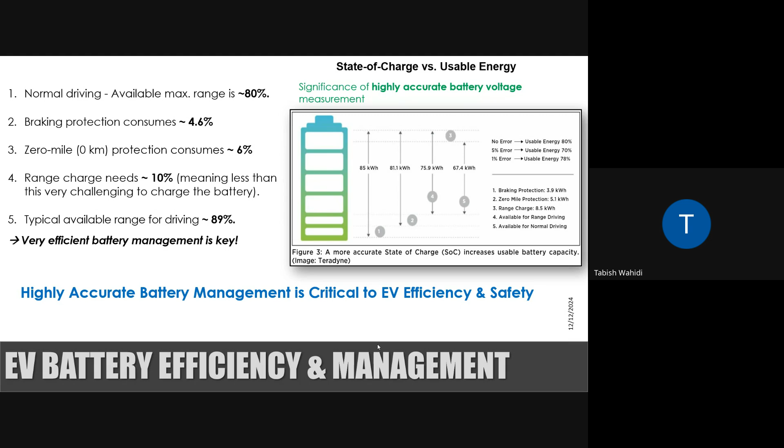So to tackle all these things, your battery management has to be considered very effectively and accurately. And all this comes with your battery efficiency as well as your safety. The safety perspective I'm talking about is the thermal management case. I'm not talking about the drop test or edge test or hardness test of the battery. I'm only concentrating on the battery thermal safety conditions.

Now, if you talk about EV applications in various sectors, it's not only one thing you need to consider, like optimizing the battery behavior so the temperature is not very high. We always have to consider how the effect of the battery comes into the complete vehicle. Sometimes your thermal runaway problem may go such that the temperature is very high and it will burn out. Suppose you are sitting in a car and your feet start feeling high heat. There is a rule called the 5-minute safety rule: if a battery starts burning, it should not burn within 5 minutes. So that needs to be considered.

Your floor temperature should not be very high. If you have an electronic system connected around this battery, your electronic system should not start burning. Because of electric heating, there will be a case of Joule heating, where you may find continuous heating because of the transfer of current. So it may come into the picture. Even suppose you are driving your car in an area where fog is very high and you need to defrost, because of that your energy consumption starts increasing.

Again, in some cases, suppose you are using your battery for cabin comfort, like using your battery power to switch on your AC. So again, your battery life, your range, everything comes into consideration. So it is like a combination. It's not only one thing linked here, that if you only optimize the battery, everything will work fine.

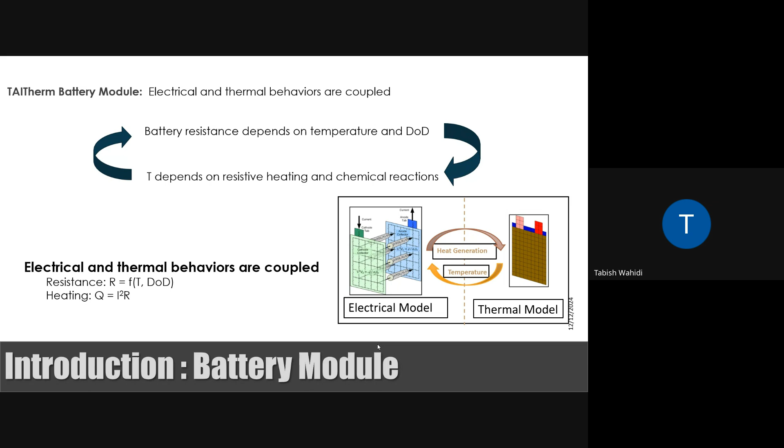All these, am I audible to everyone? Hello? Yes, sir. Okay. Just a little switch on, noise, confusion. Okay. Fine for everyone? Hope I am visible to all you guys so that we can interact with each other.

Okay, so your battery behavior depends on so many things. One very interesting thing is your battery depth of discharge. Your resistance is a function of your temperature as well as depth of discharge, and heating depends on how much current is passing through and what the resistance is. So you need to balance these two to understand your thermal management in these cases.

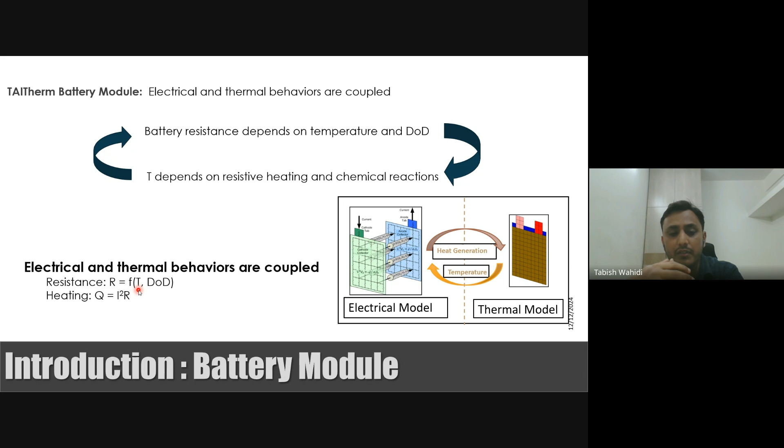Now, a few things need to be considered when you have a battery around. One very important thing is what type of battery packaging you're using. Are you using a pouch cell, a prismatic cell, or a cylindrical cell? All these batteries have different applications. Suppose Tesla is using a cylindrical cell, Tata is using a prismatic cell, and another is using pouch cells.

It depends on how much space they have, what efficiency they are offering you, how much range they are offering you. This depends on so many things, not just one thing I'm talking about. So when you have a battery, thermal modeling comes into the picture. Everything needs to be considered based on the type of battery cells.

If you have a hybrid vehicle, suppose you are trying to integrate your battery with IC engines, the modeling will be completely different, because when the exhaust gas is coming out from your exhaust system, the temperature nearby will be very high, and you already have a battery pack inside there. So how are you going to tackle these two things so that your battery has maximum efficiency and you don't have to worry about high temperature conditions while the exhaust and IC engine are running?

Now we'll come to a few things like cooling optimization techniques, what type of cooling you can do, how you want to balance your load. Suppose two or five people are sitting inside, so mass balancing also comes into the picture. And there's the case of fast charging. Suppose you have to go somewhere urgently and don't have time, so you go for fast charging. Because of fast charging, the temperature goes very high. So you need to balance all these things.

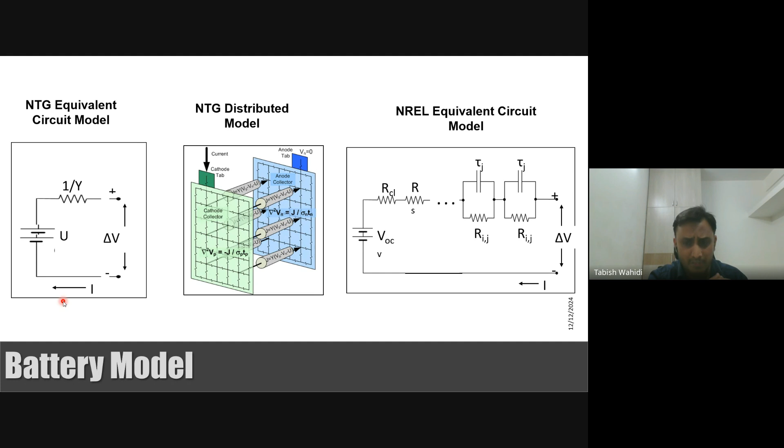So we have three types of models when we do the battery modeling. One is called the equivalent circuit model. One is your distributed model, and one is a very commonly used and well-known model, NREL. All these models are quite common when you're trying to model the battery. Each has its own advantages and limitations. Each has its own disadvantages too. So let us discuss this.

Suppose you talk about the distributed model and compare it with the equivalent model. Generally, in a distributed model, we need to give a lot of inputs when you start the simulation. So it will demand a lot. Every input needs to be given. What is the flow rate? What is the current distribution? How is it running? How is the temperature distributed? How is the voltage distributed? Everything will come into the picture. Because of the high detail, obviously your simulation will be a little bit slow.

But it's very good when you do a cell model. Very good. It will give you complete information: where the hot spots are coming, how your temperature is getting distributed. So for cell level analysis, it's very good. But if you talk about pack level analysis, it's difficult for a distributed model to analyze it. So people started trusting the equivalent circuit model. It requires very low detail, so the simulation becomes very fast, and it is well known for the pack model.

And along with that, suppose you have a drive cycle analysis, you keep on driving different routes, you have uphill or downhill, highway driving, or city driving. So with all the rash or smooth driving conditions, your driving cycle comes into the picture, and then people start trusting the equivalent circuit model. So each has its own limitations and its own advantages.

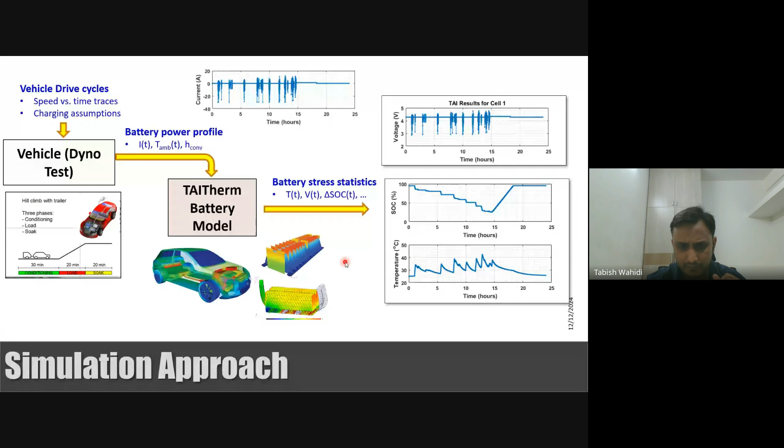So coming down to a few case studies that I'll discuss from when we had interactions with different OEMs, and we published some papers along with them. Okay. So one of the very interesting cases is what is called thermal runaway. People generally find thermal runaway conditions very interesting. You may find videos on social media where a battery starts burning very high. All of a sudden the temperature starts increasing a lot, and it is burning like anything. Smoke will come out.

So when people came out with the idea of EV batteries, they didn't know about this thermal runaway condition. After vehicles came on the road and a few things happened, people came to know about thermal runaway conditions, and they're trying to find what exactly it is. Okay, so people define thermal runaway as happening when you have an unwanted chemical reaction inside your battery. It may happen because of a short circuit, or internal discharge, or overcharging conditions, or when your ambient condition is very bad and you have very high temperature. So understanding this is very important. If your batteries start burning very fast, your complete pack will start burning.

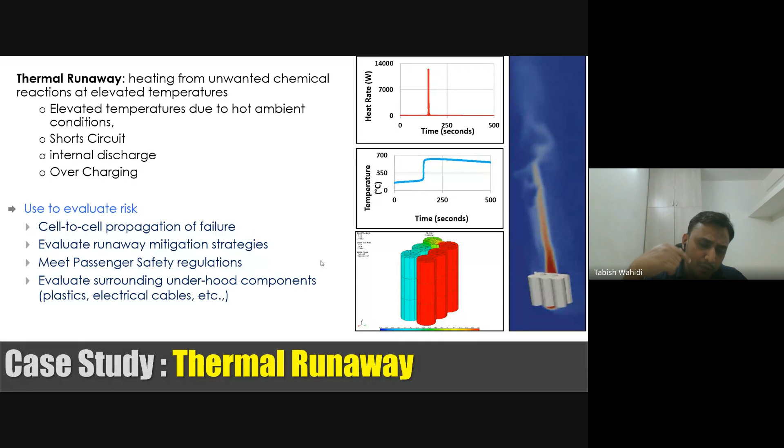If one cell goes into runaway, it will start propagating heat to the nearby cell, and because of that, the complete pack will start burning. It's very important to understand how heat is propagated from one cell to another, and how much time it takes for one cell to burn another. We need to understand this flow and come up with mitigation techniques or strategies to mitigate this thermal runaway.

So for this type of thing, I'll give you brief information. This will be common for every interaction, whether you're trying to understand it or not.

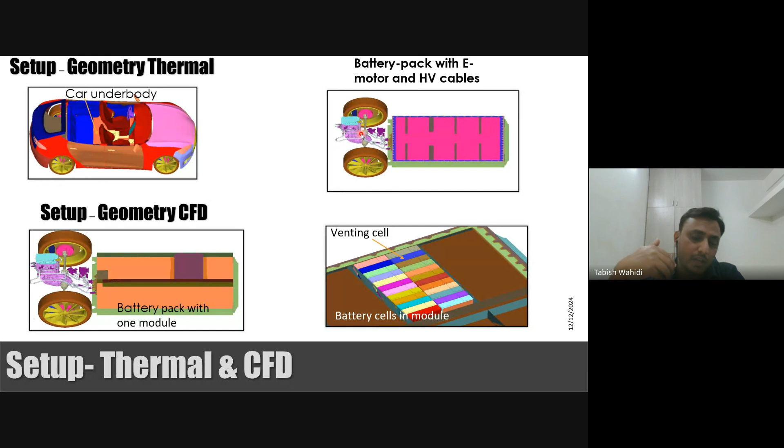We need to understand your battery model, what type it actually is: a cylindrical cell, prismatic cell, or pouch type cell. Every battery has its own nature of burning, depending on how much power the battery has, whether you're using 48-volt battery packs or whatever type it is. The number of batteries matters, and the sequence of batteries also matters, how you arrange all this, and what cooling strategies you've used earlier when trying to predict the thermal runaway condition. These are just conditions.

Sometimes to tackle this, generally what we do in the simulation is consider that your battery temperature has to be very high to understand this thermal runaway condition. You keep your gas velocity, when after burning the gas comes out, this needs to be considered very high. Generally I keep it at 100 meters, and the gas temperature will be very high, around 1000, because thermal runaway may happen after 400 or 500 degrees Celsius.

Then you have to define what material it is, and why I kept the simulation time at 5 minutes. This is interesting because NCAP maintains a standard that your battery should not burn before 5 minutes. This is a standard criteria. If your battery is burning before 5 minutes, then your battery is ruled out, you can't use it for EV vehicles. This is called the 5-minute safety rule.

Sometimes what we have to do is interact, coupling your thermal behavior with CFD. So what we do is start doing some pre-processing, which I call a CFD analysis. After doing some CFD analysis, I try to find out how much gas temperature is coming out, what is the flow pattern of the gas, and what is the flow pattern of the fluid. So I come out with a heat transfer coefficient value, I try to find the temperature of T fluid, then try to couple it with the thermal solver.

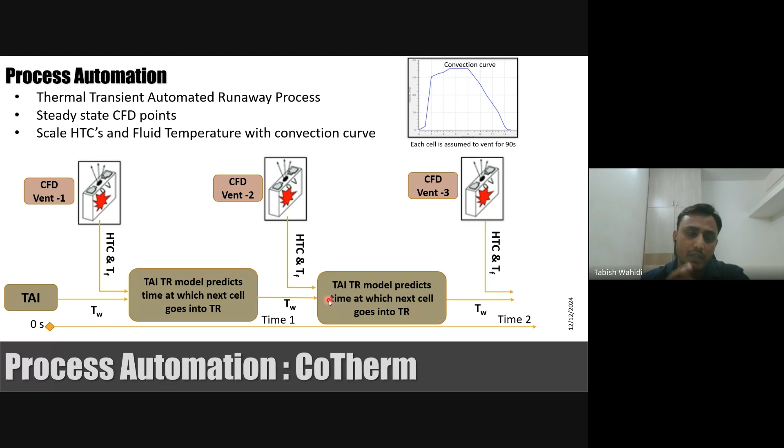So I'm going to deal with one case where we have a battery pack of 24 prismatic cells, and we need to configure it as per the information given by the OEM, what sort of electric current is flowing, how the distribution is happening, and what type of model they are using, this NREL model or distributed model, that we need to configure.

Then you do the geometry or meshing for this simulation, and we try to mitigate it. There are so many strategies to mitigate: you can provide a passive cooling system, you can go for an active cooling system, or people come up with a phase change material cooling system also. So you may come up with a solution that change of material will be the solution, or you can increase the thickness between the cells, so that if your thickness is very high, the time of propagation of heat will be more.

In this case, what I'm going to discuss is the change of insulation. We'll try to understand how temperature propagates from one cell to another cell, and what is the time of thermal runaway. After how many minutes will the complete cell start burning, the complete pack start burning. We'll try to understand which thickness will be optimum so that the battery won't go into runaway. This is the case scenario.

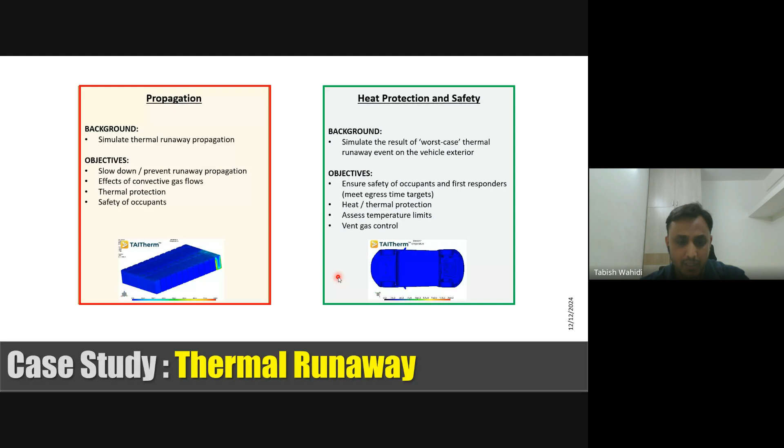Along with this propagation of heat transfer from one cell to another, I'm also trying to understand this aspect: suppose your battery gets very high temperature, because of that your floor temperature becomes very high, your motor wires or motor will start getting very high temperature. Because of that your motor may get burned, your wire connections may get burned, or your electronic system may get burned. We'll try to understand this scenario too, along with the runaway condition - how the battery is running away, how much time it takes, and how the inside temperature, floor temperature, motor temperature, and cable connections are absorbing the heat. So this is the connection.

First, what we will do is trigger one cell. We trigger one cell with very high temperature, suppose 1000 degrees Celsius, so the cell goes into runaway. Then we'll try to find how much time it takes for the other cells to go into runaway. There is a sequence going on - the second cell goes into runaway after 1.5 or 1.9 minutes, another goes at 2.5 minutes. So from one cell to the other, the complete battery runs away within 5 minutes. All things are running away within 5 minutes.

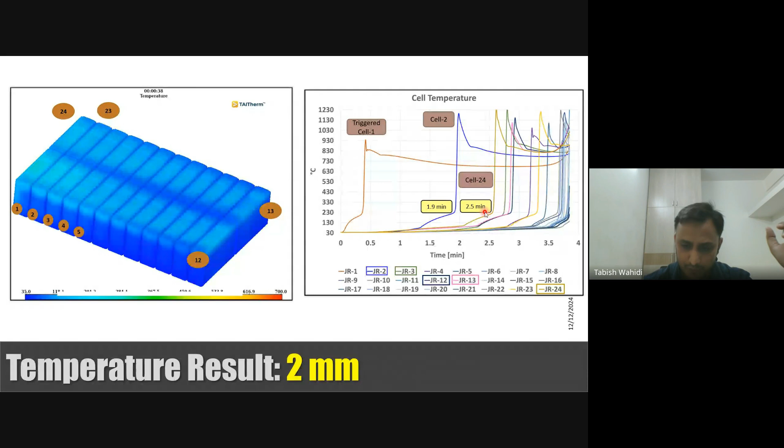Now we'll start doing the calculation by increasing the thickness between the cells. We'll increase the thickness, and also calculate the temperature of the surface - how much the surface temperature is going up. If you try to find it out, the temperature goes more than 500 degrees Celsius. From that initial calculation, we found that if you don't have any insulation between these, your steel layer and carpet, the temperature will be around 500 degrees Celsius.

If you put any insulating material like polyethylene foam between your carpet and steel, the temperature may go up to around 80 degrees Celsius. That is also a way to insulate your floor. Still, your temperature is very high, around 80 or 70 degrees Celsius - not easy for a human sitting on this to feel comfortable. It's not possible. But although from 500 down to 70, we can achieve this by putting polyethylene foam insulation in between. So just giving you information that because of runaway, your floor temperature is also increasing.

Now we'll try increasing the cell spacing to 4mm, and also try 8mm, and then compare how it will be. Now if you have a 4mm cell spacing, we'll try to understand how this propagation is happening. If you look into this, the propagation is quite different.

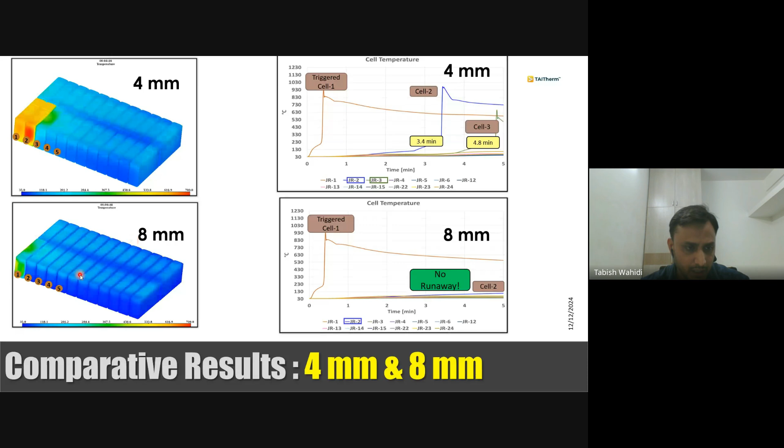So as a sequence, I started increasing thickness from 4 mm to 8 mm. Now from 8 mm, you can feel the difference in heat propagation. From one cell to another cell, it's taking more than 5 minutes to burn out, so your second cell is not burning within 5 minutes. With this, we find that if you keep your thickness around 8 mm, you can avoid thermal runaway conditions. So just by changing cell thickness is one way to counter thermal runaway.

So my question is, do we have only one method to do all this? Can we go for a combination of methods instead? Suppose by increasing to 8 mm, your battery mass comes into picture, so we need to optimize this. How can we do that? Again, we need to come up with new strategies.

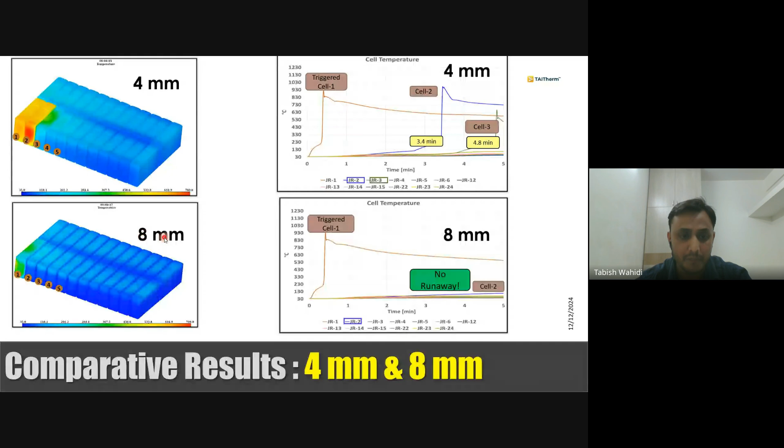Although 8 mm is sufficient to tackle the thermal condition, your cell thickness increasing means your complete battery pack weight is increasing. Now we need to go for another method, and we'll try to find it out.

If you have a 2 mm cell versus an 8 mm cell, there will be a difference in surface temperature also. The surface temperature comes down much less this time, and also you can protect your engine, your motors, and nearby electronics condition. So these are methods we can use to tackle this.

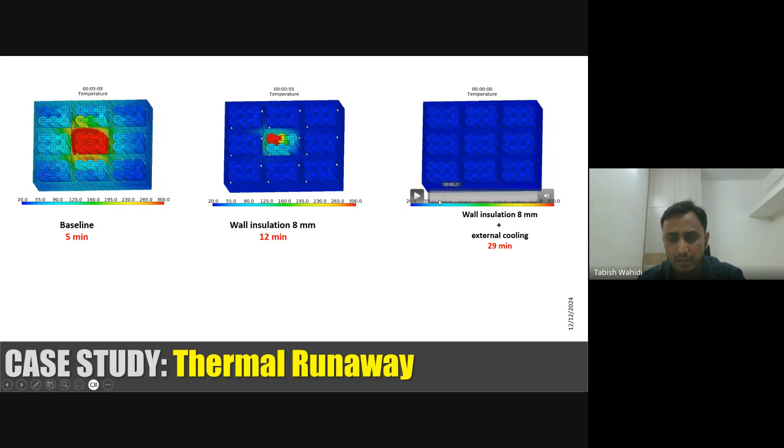Suppose you have a condition like 8 mm, then 5 mm safety insulation, then you try to insulate it with... okay, I need to change this, actually it is 5 mm only.

So with 5 mm and an external cooling system, you can increase it to 30 minutes also. We can optimize by balancing things - your mass balancing as well as your electronic cooling system balancing. That is very important. When you have to balance your mass, you need to come up with a new plan.

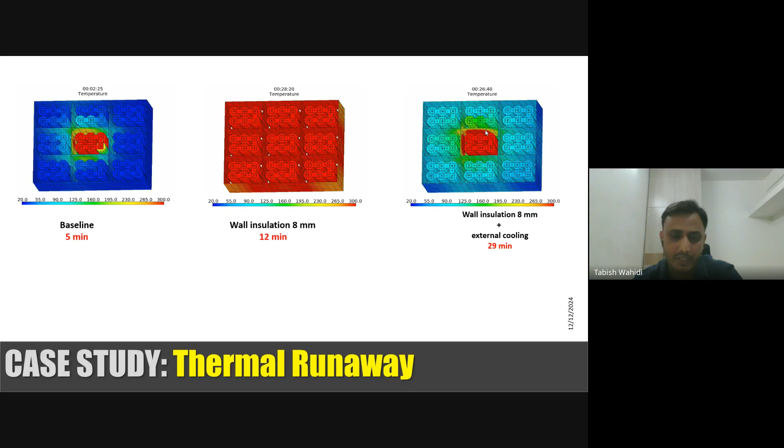So this is the strategy we finalized: wall insulation of 5 mm plus an external liquid cooling system. This will help increase your burn time condition, and you can go up to 30 minutes. That is the final study we found.

Now I'll discuss one very interesting scenario, called fast charging cases. Suppose your battery is very small - you are using a small battery, say a cell of 25 ampere hours. Because of your fast charging condition, your battery temperature will go very high.

Take a condition where you have 1 hour of city driving, then you have to go for 15 minutes of fast charging, and you do it 4 times. This is one case scenario, and you compare this with 1 hour of city driving plus 2 hours of normal charging, also done 4 times. These are just for comparison between us.

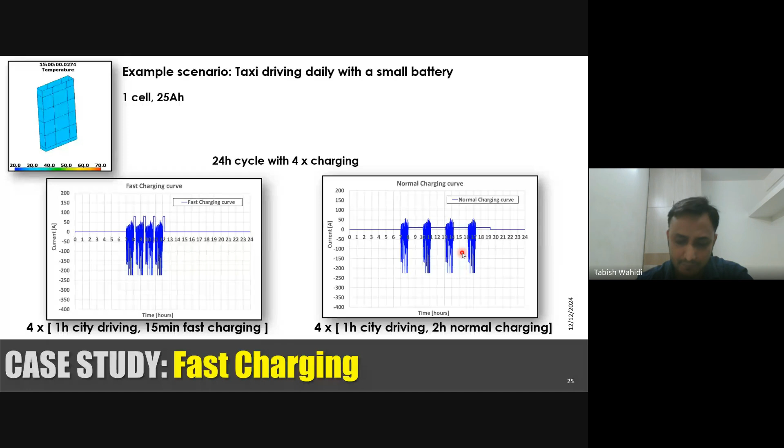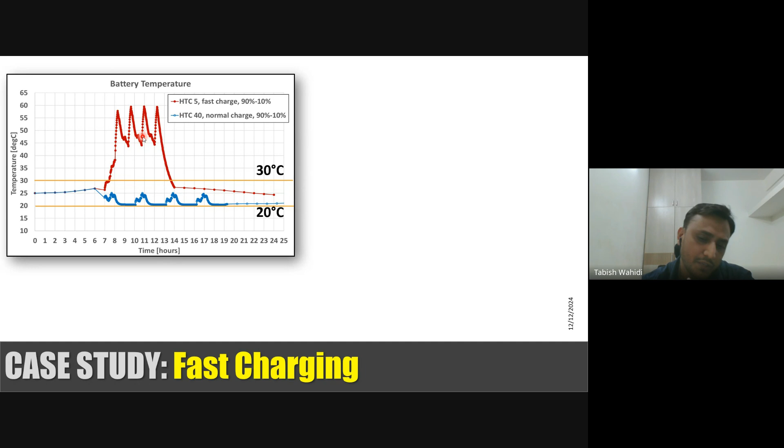Okay, so if you have a battery and you try to do it in a fast charging condition, generally the ideal operating range we used to keep your battery in will be between 30 to 20. But because of the fast charging condition, your battery temperatures are going very high, touching up to 60 degrees Celsius. Because of this, if you keep on doing all these things continuously, there is a chance that your battery life will come down.

So if your normal battery condition is suppose this much, you may lose up to 2 years or 1.8 years of this because of the fast charging condition. Your battery life may decrease very highly. Okay, so with this we can say that battery charging causes very high temperature, that is for sure, and it also impacts the lifetime of the battery.

Okay, now what we can do, that is very important. What sort of cooling strategies? It is sure that we have to come up with cooling strategies when you have a case like fast charging every day, and you can't avoid fast charging because you need to run a taxi every time, and after a lot of city driving you have to keep on charging, because you can't increase the size of the battery. So we need to keep on fast charging, we need to earn more. Suppose an auto wala is doing such a thing. So what sort of plan do we need to come up with?

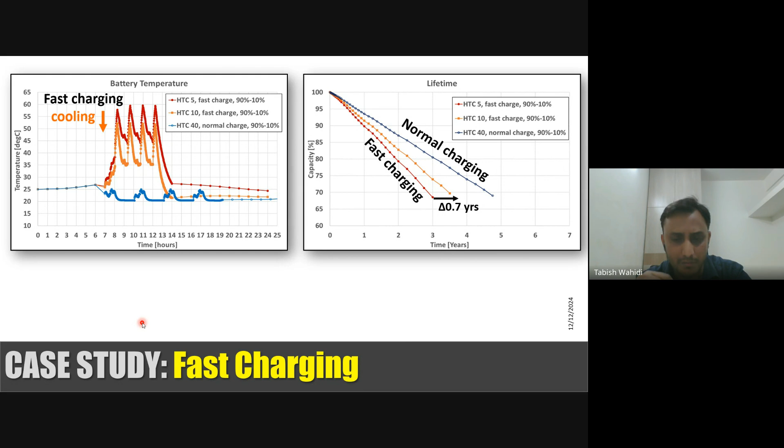Now, one is fast charging along with a cooling system. Suppose you provided a cooling system with a heat transfer coefficient of 10, keeping your fast charging condition as it is, and you compare with normal cooling conditions, to find how much we can improve the life, because before it was a loss of 1.8 years, almost 2 years of battery life lost. So with this HTC value of 10 and a proper cooling system, we can increase the battery life by up to 0.7 years more.

Okay, do we have any other method to increase it? We'll check it out. Suppose you increase your HTC value from 10 to 20, still we can increase the life of the battery, up to 1 year. Let us change one more value. Suppose you go with an HTC value of 40, your battery life may increase by 1.4 years. Before that, it was a 1.8 year loss. Now you have only a loss of 0.4 years if you keep on charging your battery in a fast charging condition.

So cooling improves the lifetime of the battery, and it also depends on what type of cooling strategy you are using. Are you using a passive cooling system, a water cooling system, or an air cooling system? What is your cooling pad design, how you model it, what is the optimum design? Everything will come into picture when you do all these types of analysis. We may come up with a better design with design optimization, for example a topology optimization of a battery cooling pad, to increase the battery life. That is just this example of the fast charging condition.

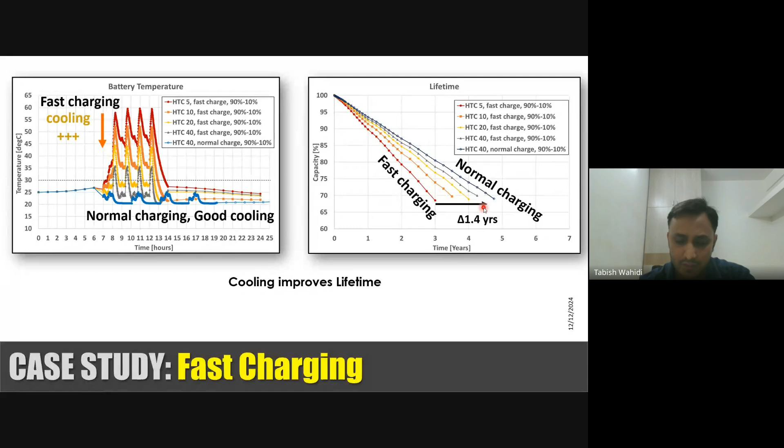Now I'll discuss a very interesting case called plug-in hybrid. In plug-in hybrid cases, you have an exhaust system, and you mount the battery over this exhaust system, your battery is located here. When your exhaust system is running, your battery will start absorbing heat. Because of continuously absorbing heat, your battery life may get impacted. We need to think what sort of strategies we have to use, because of high temperature there may be a chance that your battery cells go into thermal runaway.

So deciding where I should keep my battery is also a better way of thinking. All this is very important. Where should I keep my battery? Whether it will be near the exhaust system or away from it, and do we have proper space to put it so that your battery does not get damaged because of any condition happening.

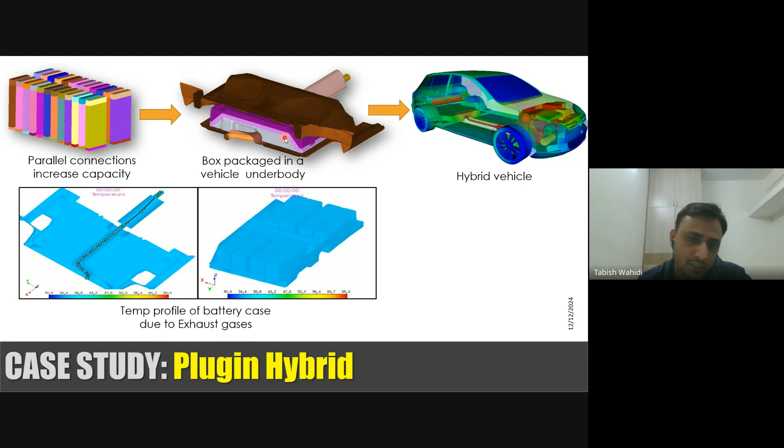So all these you need to consider when you have plug-in cases. Now, as we try to understand why we do all these plug-in hybrid cases, just a few things. First, suppose you have mounted your battery, and you don't have space to mount it somewhere else. You mounted your battery just above your exhaust system. It will look something like this. Your battery pack is up there and all these exhausts are working.

Then we try to find out how much temperature is coming. You create a fluid domain around your exhaust system and try to calculate how much temperature is coming because of the exhaust burning. We'll try to find out this temperature, and because of this temperature, how much heat your battery is absorbing, because of the high temperature across your exhaust system.

Then we'll try to come up with a solution. How can we do it? Do we need to provide a proper cooling system around this, or is one single insulation sufficient to protect your battery? In this case, we provided an insulation around the battery that was sufficient to protect our battery. With this, we found that the gas coming out from your exhaust system is also not hampering your battery. Your battery cells are not going into runaway. Your battery life is not even getting hampered.

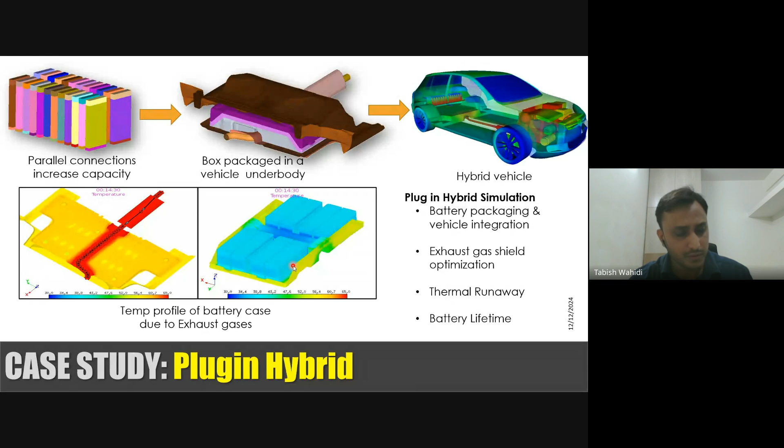So when you have plug-in hybrid cases, many things become very complicated compared to others. Now I'll give you one very interesting case, called HVAC optimization with humans sitting inside. Take the electric bus scenario: nowadays around Bangalore and other cities, electric buses are running throughout the city. With electric buses we face multiple problems. Suppose you switch on your AC. Because we don't have an exhaust system, the HVAC will use your battery power, and generally we found around 40% will be taken by the HVAC system to maintain the inside temperature.

And the problem won't stop here, because your HVAC is already consuming your battery. Apart from that, you don't know when your bus will stop, when your door will open, when your door will close. It's not like a car where you're driving your own vehicle and you know where to stop and when to get down. In a bus, you have multiple stoppages. After every kilometer you need to stop, open the door, close the door. Because of that, your HVAC optimization will be greatly adversely affected. And for the people coming inside, you don't know how many occupants will sit inside, what body size and mass they have; that also comes into the picture.

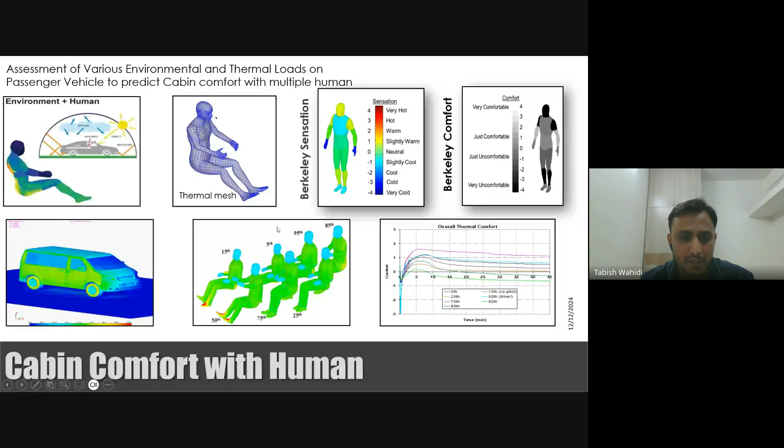So this case was very interesting. We need to understand a few things. Just an example: suppose humans of multiple different body sizes are sitting inside at different locations. Someone is tall, someone is fat, someone is average size. Everyone has a different physiology and different body mass index. And based on that, which one is sitting near the HVAC system and which is sitting away from the HVAC system. This is also very interesting for you.

And then apart from all these things, we need to understand, if say AC is switched on, what the human comfort level is, what his sensation level is, whether he's feeling comfortable or not, whether he's sweating or shivering. Those we need to consider.

So to tackle these things, to understand human behavior from the perspective of comfort and sensation, Berkeley, you might have heard of the University of Berkeley, developed a model called the Berkeley model that is widely used all around the world by the automobile sector to understand human comfort and sensation. Both are different. Don't think both are the same. Sensation and comfort are different.

I'll give you an example. Suppose on a summer day you are outside. Suddenly you enter your home, and your AC is around 16. All of a sudden, when you enter your home and your AC is at 16, you will start feeling comfortable, very comfortable. Although your AC is at a very low temperature, you start feeling comfortable.

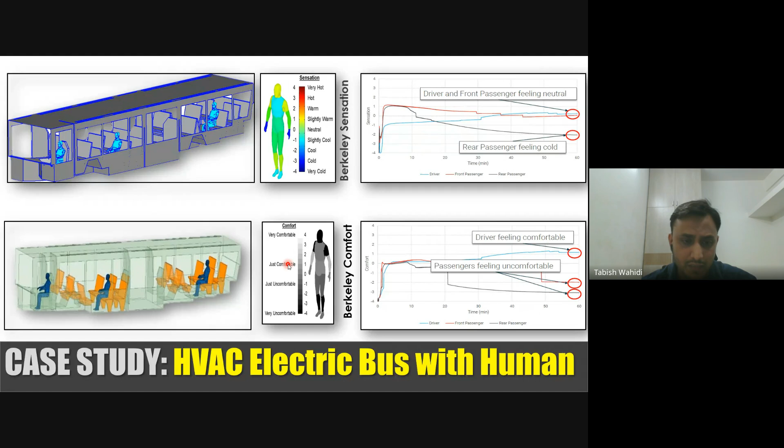Suppose your AC is just in front of the driver, the air blown from it may disturb your driver while driving, or the air coming out may be so cold that the driver starts feeling chill. If the driver gets disturbed, the whole thing gets disturbed. So that we need to understand. Based on that, we can suggest the in-cabin condition if your bus's battery is being used by the HVAC system. All this is a very complicated case that we did for one OEM.

Now I'll discuss one scenario called the drive cycle scenario, and this is very interesting. Generally on the road, we count the mileage of your vehicle. It depends on how you drive your vehicle. If you have rash driving, your mileage is less. If you have smooth driving around 40, 50, your mileage will be very good. The battery also behaves in the same way.

So suppose your driving pattern, your speed, is continuously changing. You are driving in the city or on a highway. What are your battery parameters, what is your driving pattern, and what is the weather condition there, whether it is a hot day or a cold day.

Okay, and what are the EV parameters you have, what is the size of the battery, how much power the battery has, what type of battery it is, whether cylindrical, pouch or whatever battery it is. So everything you need to consider, and then based on your driving pattern and driving style, we can finalize whether this is sufficient for you or not.

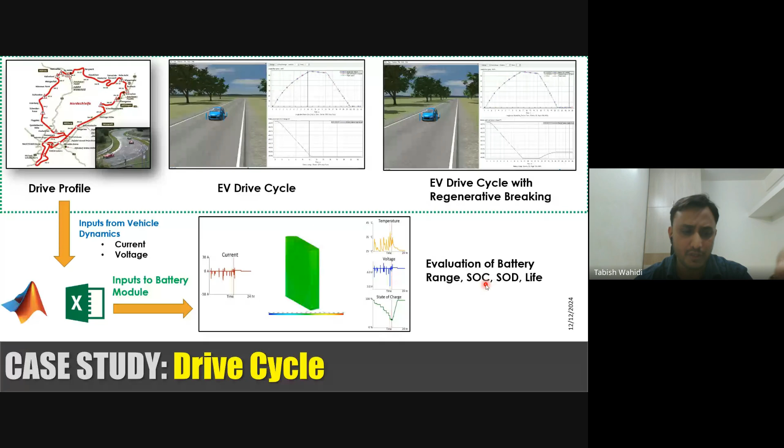You may require a MATLAB tool or some other tool to understand this one. Then you try to fit the data to your battery system. You try to calculate how the current is flowing, what the temperature is coming out, after how much time your battery gets discharged. All these will help you understand what will be the range of the battery, the health of your battery, the life of the battery, and the nature of the state of discharge or state of charge. All of this is very important. We have a drive cycle condition.

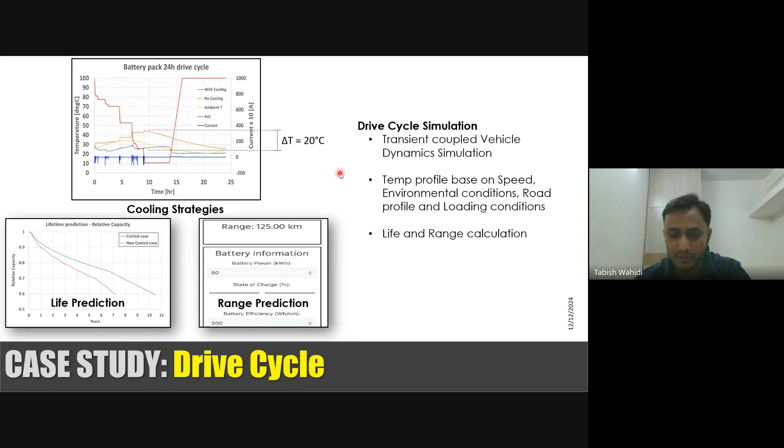This is just a flow pattern, a drive process automation chart that I'm showing to you. Based on that, you can predict the in-cell temperature with or without a cooling system, if your ambient temperature is varying, what the life and range of your battery will be. If you are driving in a very cold condition and going uphill, the battery life will be different. If you run the same battery in a desert, your battery life may be affected differently. So all these weather conditions, your geographical conditions, your road pattern, your drive cycle will help us understand the life, range, and temperature of the battery.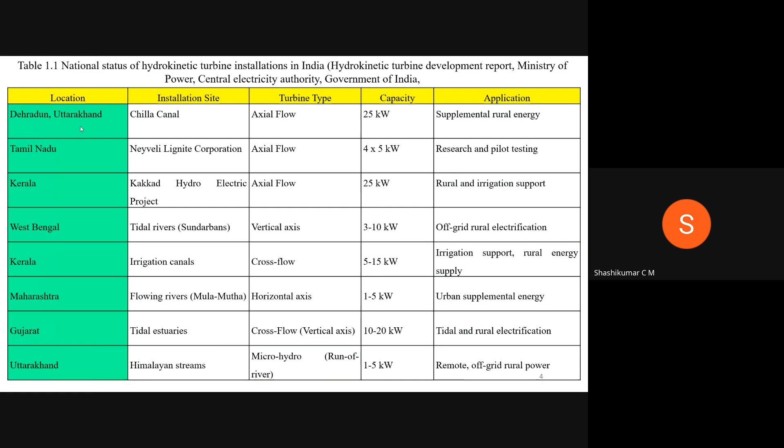Solid mooring turbines, buoyant mooring turbines. Coming to the cross flow type of turbine, the cross flow type of turbine has more advantages.

The cross flow type of turbines is mainly classified into two types: vertical axis and in-plane axis. The vertical axis turbine is classified into various types, including the Darrieus turbine, which is a lift type and also a helical type of turbine, as well as the Savonius turbine.

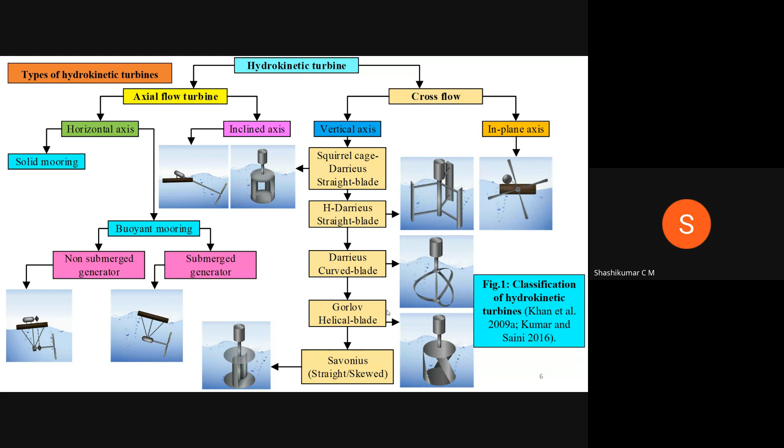The water turbine can be installed in rivers as well as irrigation channels. It has more advantages in irrigation channels, because the movement of flow is in only one particular direction, and there are no disturbances compared to a river. So we get a good amount of velocity in irrigation channels, up to 2 meters per second, so that we can extract a good amount of electricity.

To improve the performance of these kinds of turbines, various design modifications are required. These design parameters of the Savonius turbine include aspect ratio, overlap ratio, separation gap, and the use of end plates. By using multi-staging instead of single stage, we can increase the number of blade profiles. Another important parameter is the use of augmentation techniques, and also modifying the blade profiles.

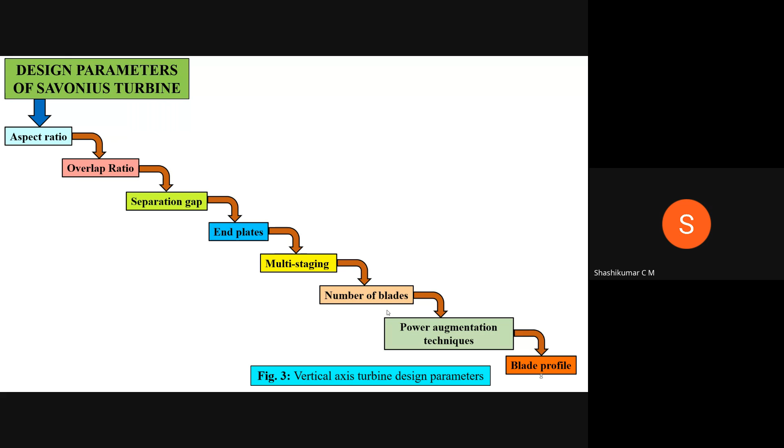The first important aspect for increasing the performance of the Savonius turbine is the aspect ratio, which is the ratio of the height of the turbine to the diameter of the turbine. As the aspect ratio increases, suppose if we install these turbines in irrigation channels, which have a very good depth of water, if you increase the aspect ratio more than 1.8, we can extract more kinetic energy into electricity, so a higher aspect ratio is recommended.

This applies if you are using these turbines in irrigation channels. H is the height of the turbine and D is the diameter of the turbine. The aspect ratio is a dimensionless parameter. These turbines have various aspect ratios ranging from 0.5 to 2.

Another advantage is using a lower aspect ratio. Suppose you use a lower aspect ratio, the torque generated by the turbine is higher. If you use a higher aspect ratio, the turbine will rotate at higher RPM. If you use a lower aspect ratio, we get more torque. Based on the application, we can use different types of aspect ratio.

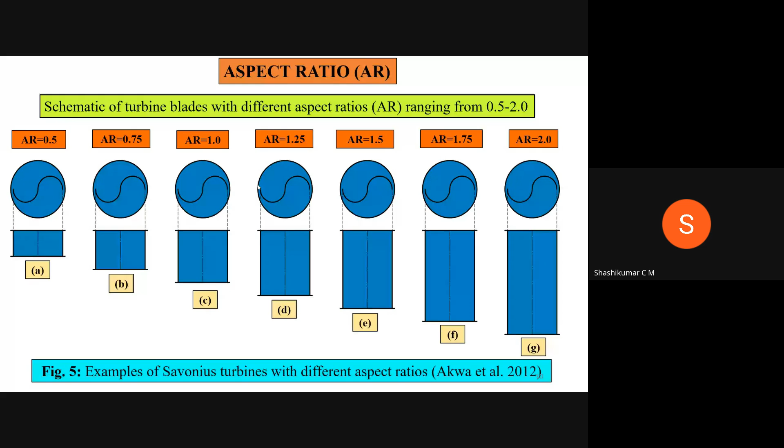Another important parameter to increase the performance of the Savonius turbine is the overlap ratio. In the previous case, the turbine did not have any overlap ratio. The overlap ratio means there is a small gap between the advancing blade and the returning blade, so that whatever fluid—either air or water—enters the advancing blade, some part of it will impinge on the returning blade profile, increasing the overall efficiency of the turbine.

An optimum value of overlap ratio is required. This is the schematic diagram for the turbine having zero overlap ratio, as well as the turbine with overlap ratio.

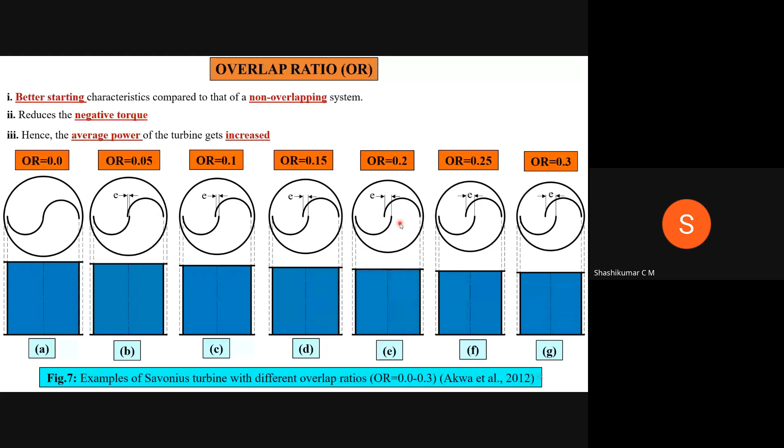If you increase the overlap ratio by giving a gap between the advancing and returning blade profile, the fluid entering will not hit the advancing blade but will directly hit the returning blade profile, reducing turbine performance. So the optimum value of the overlap ratio is 0.15, which gives the best performance.

The next design parameter is the separation gap, which is a gap provided between the advancing and returning blade profiles. If you provide this gap, the fluid entering will easily pass through it instead of impinging on the returning blade profile, so the turbine will not get good performance. It is not recommended to give the separation gap between the advancing and returning blade profiles. A turbine without separation gap gives better performance compared to one with a separation gap.

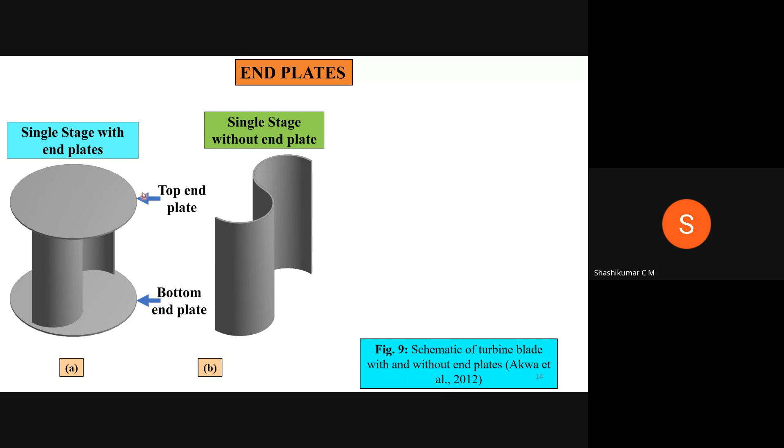Next is design with end plates versus without end plates. Using end plates causes the fluid to be protected within the turbine. The end plate is a thin circular plate with negligible thickness, provided at the top and bottom of the turbine blades. Adding end plates to the Savonius turbine increases the coefficient of power as well as the torque, since it inhibits and protects the fluid during rotation, increasing turbine efficiency. The thickness is almost similar to the thickness of the blade profile. This is a pictorial representation of the turbine with and without end plates, showing the two end plates.

Next is the design using multi-staging. With multi-staging at some angular position, for example around 90 degrees, during rotation of the turbine blade at certain angles the turbine gives positive torque, while at other angles it develops negative torque. So with multi-staging, we can increase the overall performance.

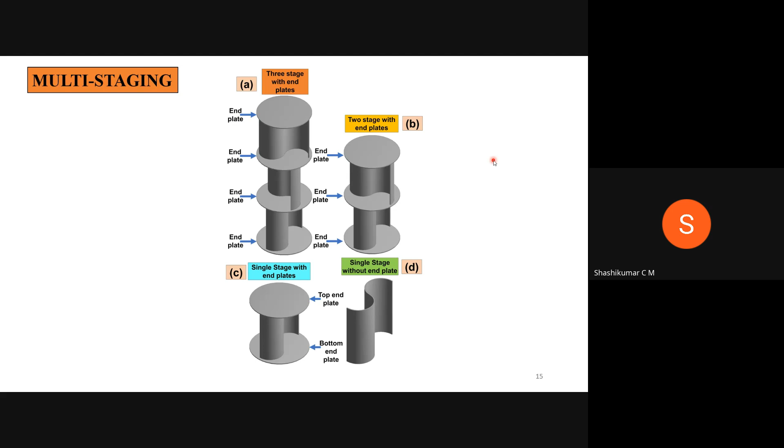This is a very important technique to improve the performance of vertical axis turbines. The Savonius turbine consists of two blade profiles: one advancing blade profile and one returning blade profile. The advancing blade gives positive torque while the returning blade gives negative torque, so during rotation, at some angle, the turbine produces negative torque, reducing overall performance. To improve performance without modifying the blade profile, one technique is to use augmentation methods.

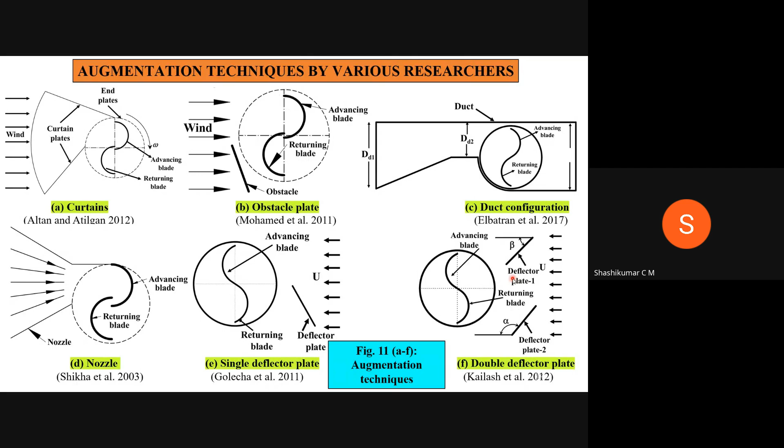So this is a ducted nozzle configuration. This is another configuration similar to the previous ducted nozzle case. In this ducted nozzle kind of plates, the plate will be placed in the form of a nozzle, the convergent section. In all the cases, the fluid, either wind or water, directly hits the advancing blade profiles. These are the various configurations developed by various researchers to improve the performance of the turbine.

Another design improves the performance of the turbine by increasing the number of blades. This is the example of the 2-blade turbine as well as the 3-blade turbine. A 2-blade turbine consists of one advancing blade profile and one returning blade profile. In the three-blade case, 3 blades will be provided; one is the advancing blade profile, and the remaining 2 will be returning blade profiles. The augmentation technique is one of the best techniques to increase the performance of the turbine.

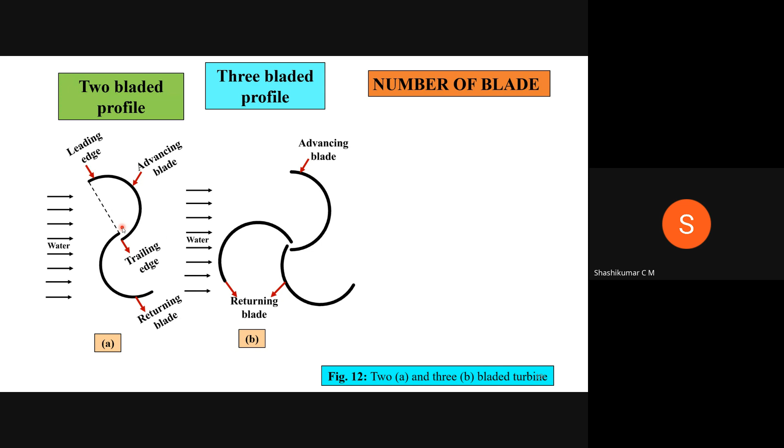First, instead of using horizontal channels, suppose they use inclined channels. In inclined channels the water flows at very high velocity, so we can convert the hydrokinetic energy into electricity. More energy is available on the slope side, so we can get very good conversion of hydrokinetic energy into electricity.

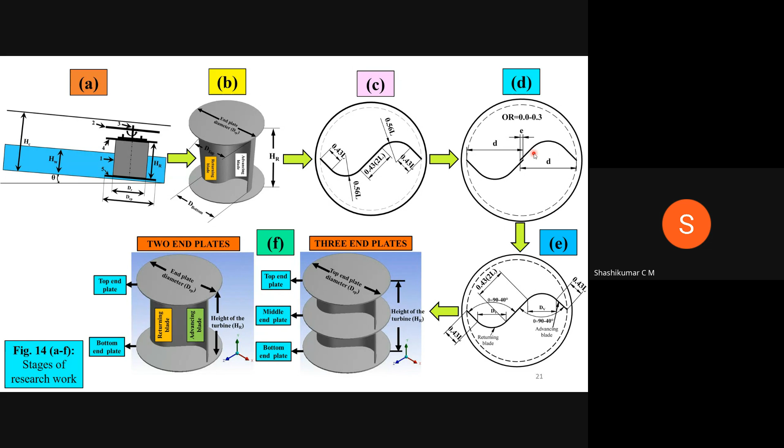Also, as we already discussed, a turbine having an overlap ratio will give better results, so providing the optimum overlap ratio for the blade profile to increase performance is also very important. With the help of end plates we get better power compared to the case without end plates. Instead of using two plates, if we use one more plate exactly at the mid side of the turbine, there will be a little improvement compared to the two-plate case.

This is the application of the turbine in the case of the flat channel and also in the case of inclined channels. This is the turbine placed in the irrigation channel. The total height is Ht. HR is the height of the turbine, and it is connected to the dynamometer or generator to convert hydrokinetic energy into electricity. D is the diameter of the turbine. The first picture shows a turbine placed in the horizontal case without inclination.

In the second case, the turbine is placed in the inclined channel, and it is known as partially submerged. Since on the slope the depth of water will be less compared to the horizontal case, the turbine is partially submerged. For the flat channel, theta will be 0 degrees. In the second case, theta ranges from 0.5 degree to 2 degrees, based on the locations of the irrigation channel.

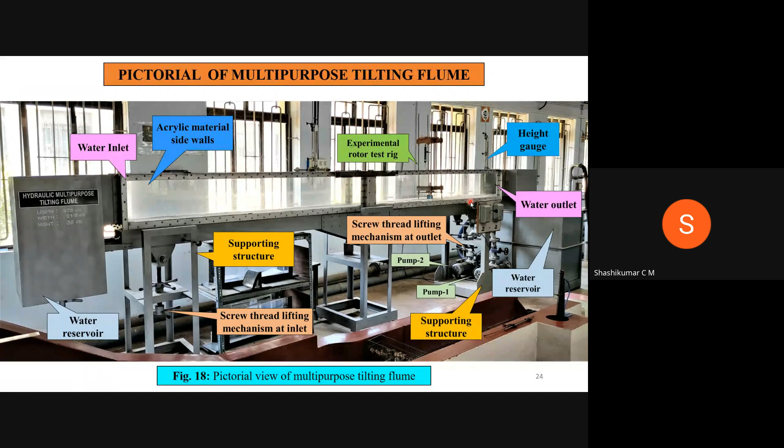Torque developed by the turbine can be measured with the help of the dynamometer, and RPM we can measure, so that we can find the conversion efficiency: from the available energy in the irrigation channel, how much energy is converted into torque. With these expressions, we can find the coefficient of torque, the coefficient of power, and also the tip speed ratio.

This is by using the horizontal channel, and also by giving slopes of 0.5 degree, 1 degree, 1.5 and 2 degree. We have conducted various orientations of the channel. From 0 degree to 2 degree is the coefficient of torque with respect to the tip speed ratio. For the case of 0.5 degree, the turbine is giving better performance compared to 1 degree, 1.5 degree and 2 degree,

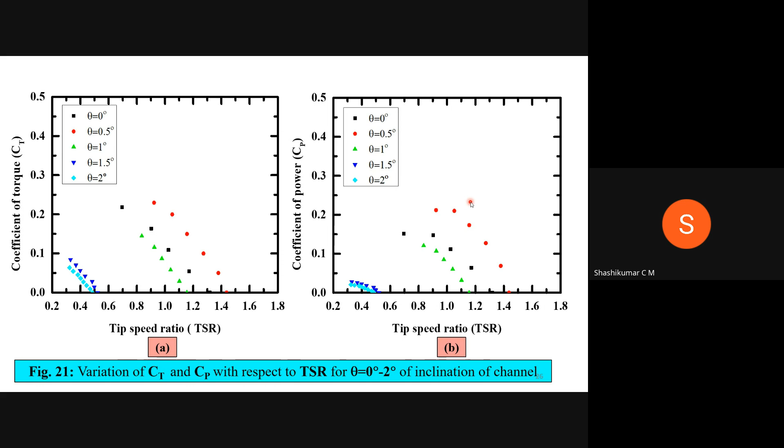because for the case of 1 degree, 1.5 and 2 degree, the energy available in the channel is very high and conversion efficiency is low, so the coefficient of torque is reducing with respect to the inclination of the channel. So the 0.5 degree inclination is giving better results compared to the 1 degree, 1.5 degree and 2 degree inclinations.

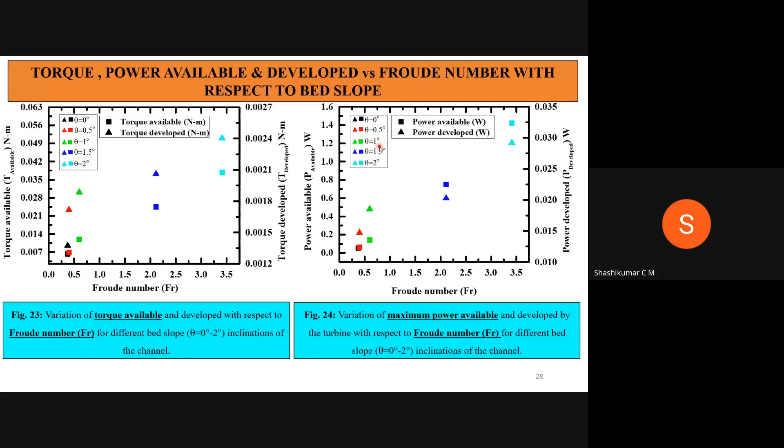This plot gives the variation of the torque available and power available for various Froude numbers, because since it is an inclined channel, we need to find the Froude number for the various torque as well as power developed by the turbine.

So coming to the second type of turbine, this is known as providing the taper to the normal conventional type of turbine. So how does the performance influence? This is the schematic diagram of the conventional turbine. The second one is the taper turbine. The conventional turbine, we already know, consists of advancing as well as returning blade profiles. In the case of the taper turbine, a small taper will be provided on the right side of the turbine.

A 5-degree outside taper is provided from top to bottom, so that there is no uniformity in the diameter. From top to bottom, the diameter of the turbine varies, and the aspect ratio maintained is 1 for both the conventional turbine and the taper turbine. The aspect ratio remains the same, and there is no overlap ratio between the advancing and the returning blade profiles. This is the turbine with taper and without taper.

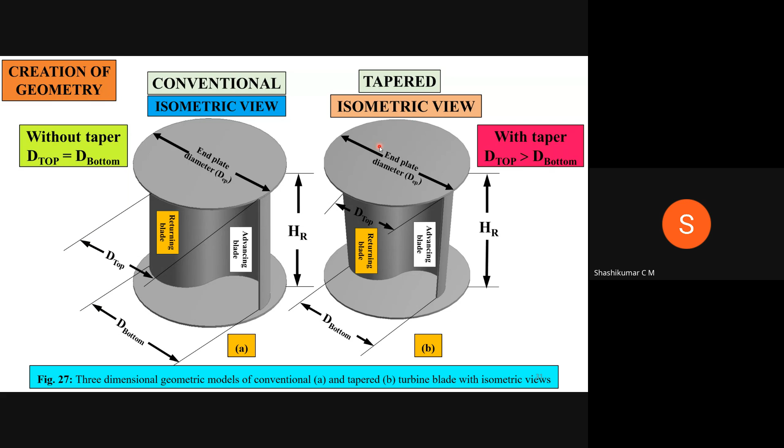Various experiments are conducted using the same experimentation technique, the tilting flume. We can find out the power developed by the turbine, and by using another technique, the numerical technique, we can find out the power as well as the torque developed by the turbine.

To measure the torque as well as the power, first we need to create the computational domain similar to the irrigation channel. This is the rectangular domain we have created. This is the turbine, and a small zone is provided on the outer side of the turbine. That zone is known as the rotating zone. This rectangular domain is similar to the irrigation channel. This is the front face of the domain, where the water enters, and at the rear face of the domain, water will leave.

Since the irrigation channel consists of three faces, the left face, right face, and bottom face, various boundary conditions have to be given in the numerical analysis. For all the walls, wall boundary conditions will be provided. For the front, a velocity inlet is provided. For the rear side, a pressure outlet boundary condition is provided. An inlet velocity of 0.5 meter per second is given to the channel.

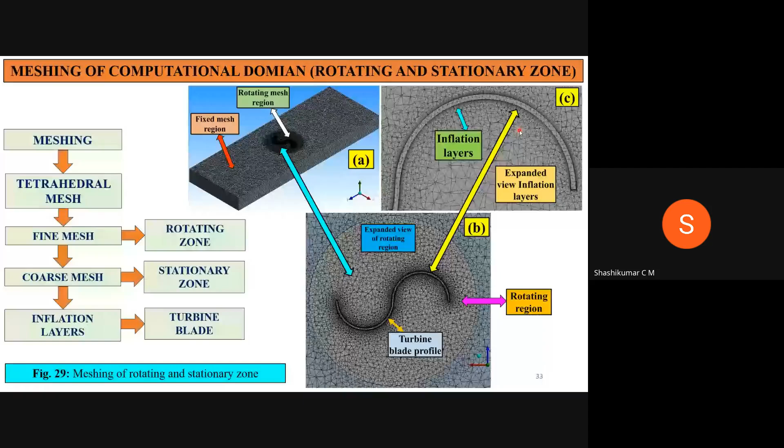These are the simple equations used to find the RPM of the turbine. First, in ANSYS Fluent, we need to give the RPM. With the help of the tip speed ratio, we can compute the RPM of the turbine by varying the tip speed ratio. For example, for 0.7 TSR, the RPM of the turbine is around 92. This angular velocity is given to the turbine, and since it is a numerical analysis, transient simulations are carried out with the famous sliding mesh technique.

For all the turbo machinery cases as well as the water turbine cases, sliding mesh technique is the famous technique which will give the accurate results compared to the steady case. It is a transient simulation, a three-dimensional transient simulation. There are two types of techniques available. One is the multiple reference frame technique. The second one is the sliding mesh technique. For steady simulations, the multiple reference frame technique will be used. For transient simulation, the sliding mesh technique will be used.

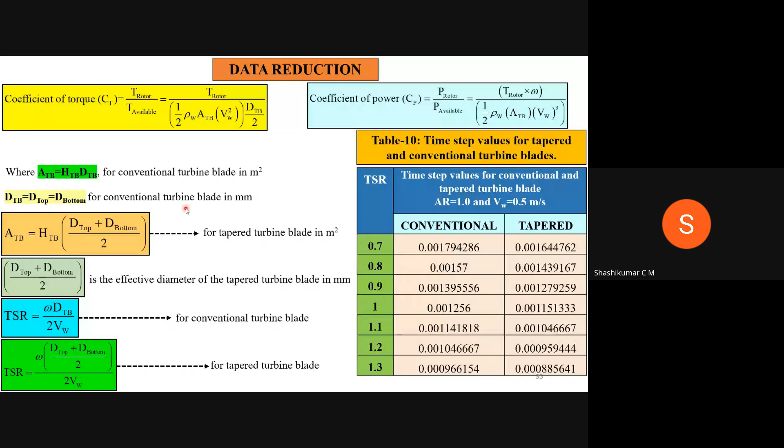Since it is a transient simulation, we need to give the time step. The time step also we have to compute to calculate the performance parameter. By using these simple expressions, we can find out the time step for one particular TSR. These are the values of time step size for the conventional turbine and also for the taper turbine, for all the TSRs, tip speed ratio ranging from 0.7 to 1.3. This time step size we have to give as an input to find out the performance parameter for all the TSRs. And also these are the analytical equations to find out the torque as well as the power coefficients.

Since it is a numerical study, before conducting the numerical study, we need to find out the optimum mesh elements. That is known as the grid independence study we have to conduct. And since it is a transient simulation, we have to conduct a time dependent study also, by varying the number of elements, to save the computational time. One optimum element count will be taken for the simulation to reduce the computational time.

So 19,87,000 elements have been taken, and the time dependent study was also conducted ranging from 0.5 degree, 1 degree, 2.5 up to 10 degree. From 10 degree to 2.5 degree, there is a huge variation in the results from one time step to another. From 1 degree to 0.5 degree, there is no change in the values of coefficient of torque as well as the coefficient of power. So 1 degree is taken as the best time step size to reduce the computational time for the CFD simulation.

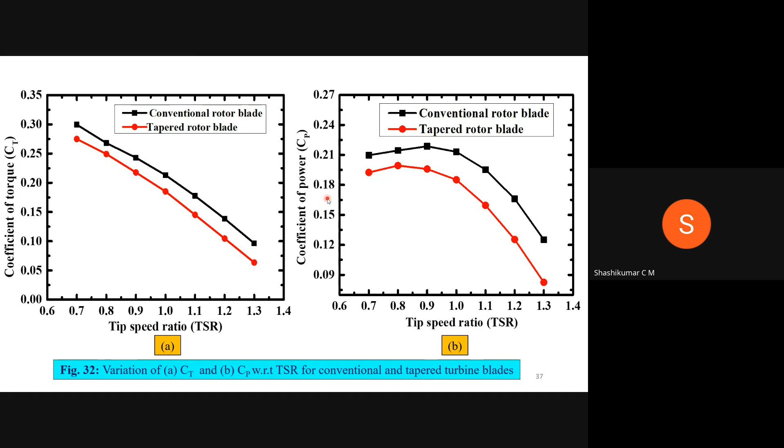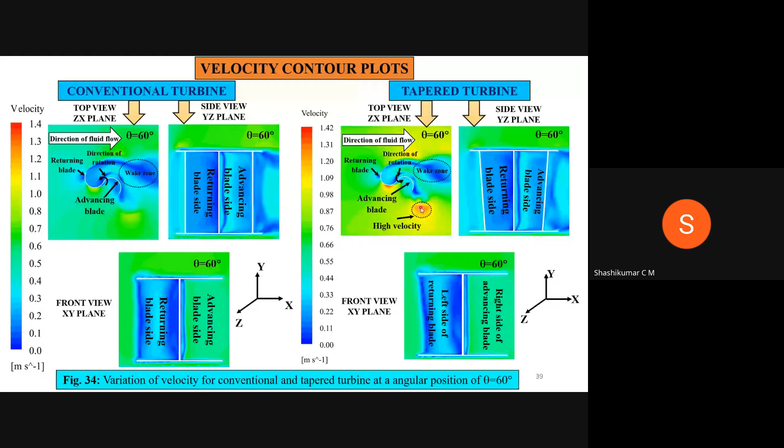Similarly, velocity contours are also shown here. We can see the high velocity zone is developed at the exit of the turbine in the case of the taper turbine. Because of this, there is a loss of energy in the taper turbine, and the turbine performance is reducing. Due to the loss of energy, the turbine performance is reducing. We can find this out with the help of these velocity contours.

To increase the performance of the turbine, another technique is modifying the blade profile by converting the conventional blade profile into a modified version. The conventional blade profile consists of a semicircular blade profile, converted into a modified version. This is another technique in the recent developments of vertical axis turbines, especially for Savonius turbines, to improve the performance by converting the conventional blade profile into a modified version.

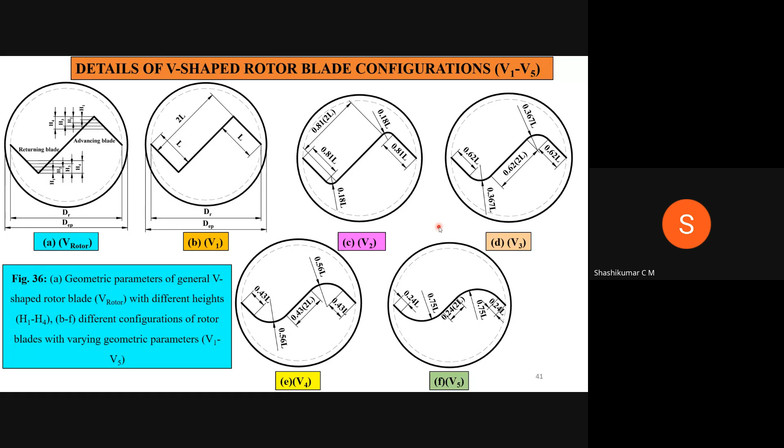By providing the overlap ratio between the advancing blade and the returning blade, the performance increases. These are some examples of providing the overlap ratio to improve turbine performance.

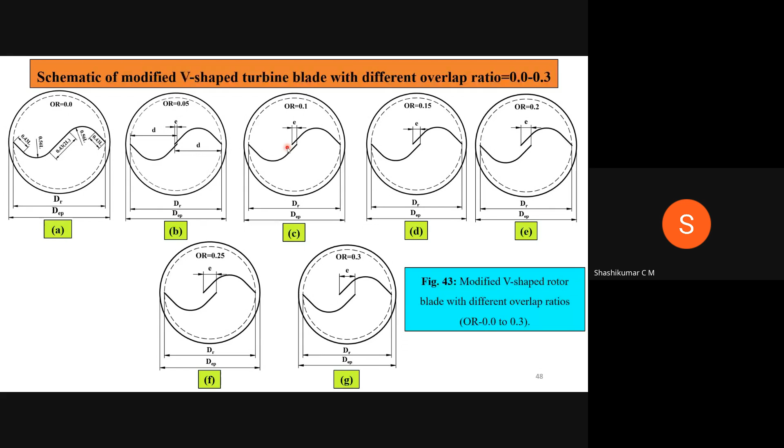A small gap, denoted by e, is provided between the advancing blade and the returning blade. By providing this overlap ratio, the turbine diameter also reduces, which reduces performance, unless we maintain the same diameter while giving the overlap ratio.

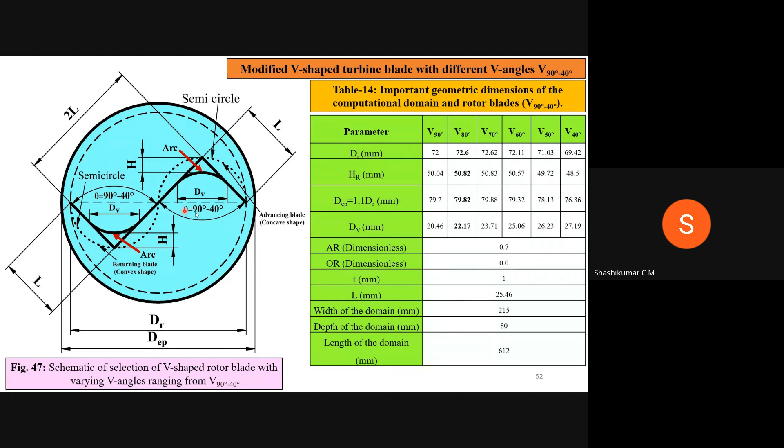Another technique is changing the blade angle. This is one method to improve performance by varying the blade angle in a modified V blade profile. Instead of maintaining 90 degrees, various researchers tested different angles ranging from 90 to 40 degrees by giving this inclination.

These are various turbine geometries with different angles of inclination. For the first case, the angle between the advancing and straight profiles ranges from 90 degrees to 80 degrees. Various angles of inclination were provided, and researchers conducted similar numerical and experimental studies to determine performance parameters.

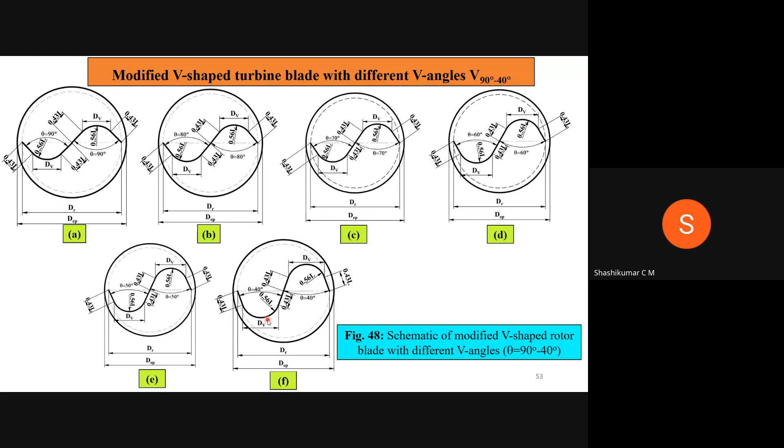These are the various results obtained after experimentation for all inclinations. The 90 degree and 80 degree inclinations give better results compared to the remaining inclinations of the advancing blade profile. This is because the advancing and returning blade become almost similar to the semicircular case, so the fluid acts directly on the returning blade profile, generating more drag there. Therefore turbine performance reduces for all remaining cases compared to the 80 degree inclination.

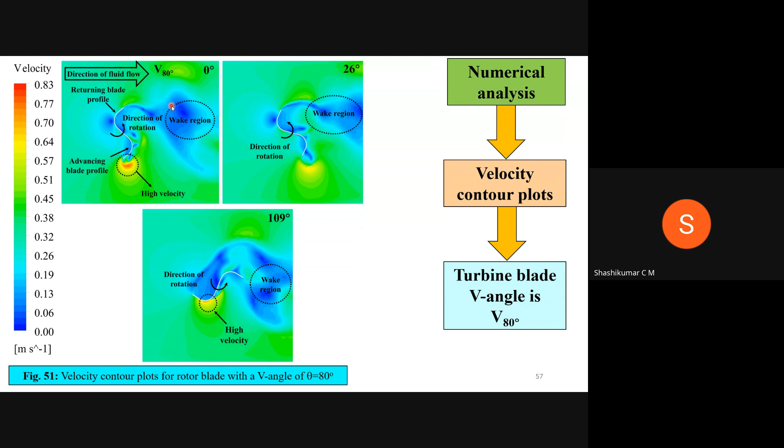On the right side of the turbine, another zone is developed known as the wake zone. This wake zone is very important when installing turbines in actual practice, such as in irrigation channels. When the distance between the first turbine and the second turbine is very close, turbine performance reduces. So with the help of this wake zone analysis, while installing turbines in actual irrigation channels, we need to maintain a certain distance to get equal electricity production from each turbine. From this we can learn how to install turbines in irrigation channels.

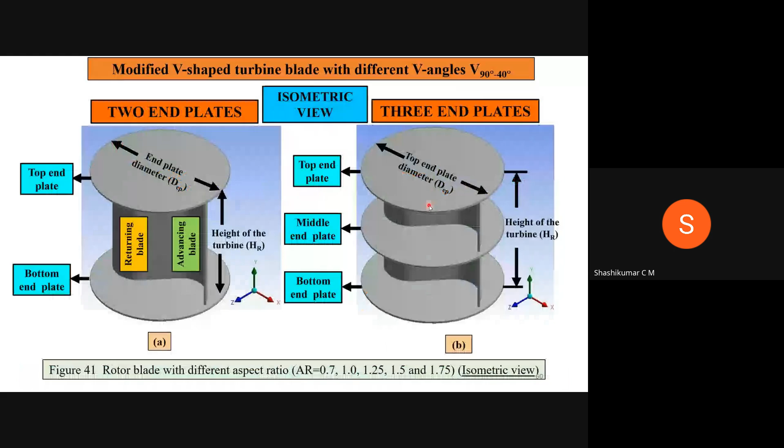These are the various parameters studied for all the aspect ratios for the 2-plate case, and for all the aspect ratios for 3 plates. Thus all the turbines are tested in the test rig to find out the optimum aspect ratio and also the optimum end plates, to determine which blade gives the better results.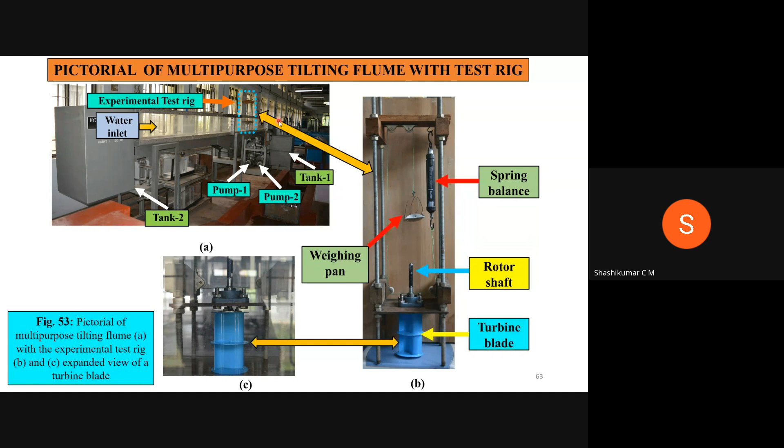This is the expanded view of the turbine placed in the irrigation channel. The same test rig was placed in the multi-purpose tilting flume to conduct similar experimentation. The total height of the turbine is around 15 centimeters, and the total depth of water maintained is around 17 centimeters, because all the turbines are tested under fully submerged conditions.

Also, the turbine with 3 plates performs better compared to the turbine with 2 plates, so we can recommend that a turbine having 3 plates gives better performance compared to the 2-plate turbine case.

For this case also, experimentation as well as numerical study was conducted using the same test rig, the multi-purpose tilting flume. This is the numerical model used to conduct the investigation for the 3-dimensional study. This is the case of a two-bladed turbine having 2 end plates, and this is for a 3-bladed turbine, where the number of blades is 3.

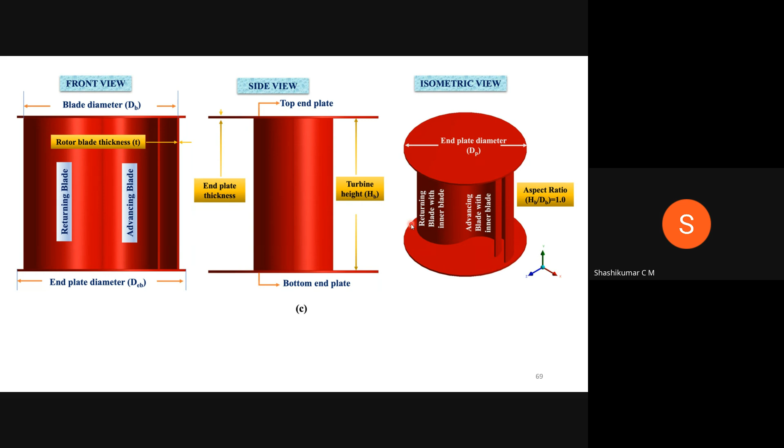This is the case of a turbine having 2 advancing blades and 2 returning blades, as we saw in the previous case. This is the line diagram for a turbine having 2 advancing blades and also a turbine having 3 advancing blades.

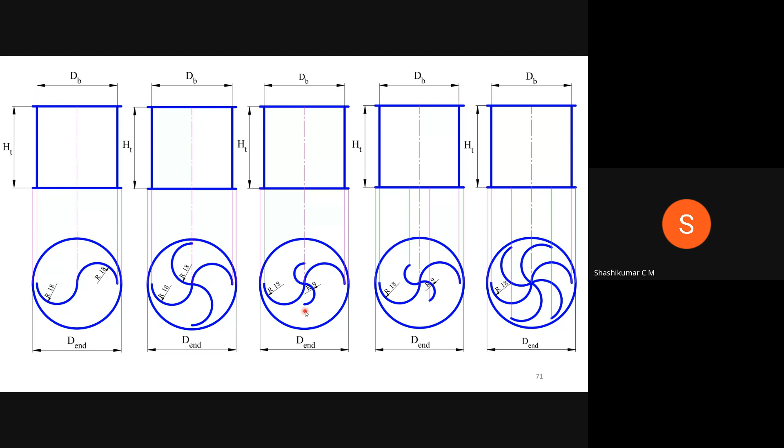One more study was conducted to find out how, if we vary the diameter of the advancing blade, the turbine performance changes. This is another case comparing turbines with various diameters of the advancing blade as well as the returning blade, by increasing the number of blades. The last one is a 6-bladed turbine, and a similar numerical study was conducted for this case also.

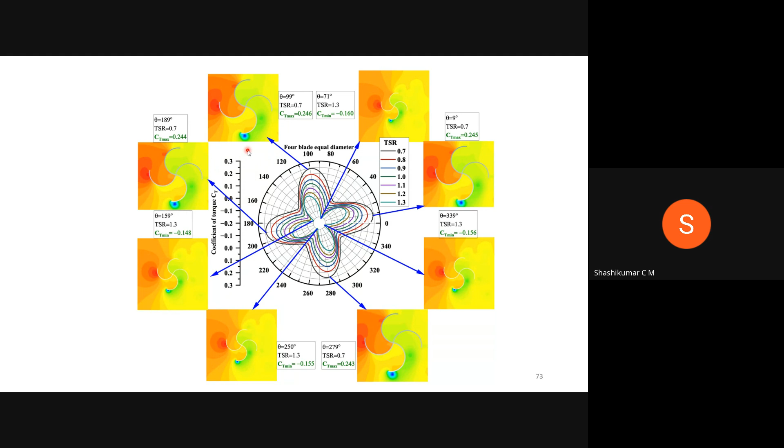This plot is for the case of a two-bladed turbine. Similarly, for the case of a four-bladed turbine, we can easily identify that a turbine having more than two blades, in most of the cases, generates negative torque. More negative torque is developed in the case of the four-bladed turbine, so the two-bladed turbine has better performance compared to the remaining blade profiles. This is the same polar plot for the case of the four-bladed turbine.

Similarly, by varying the advancing blade profiles, reducing the third and fourth advancing blade, we see how the turbine performance varies. This is the schematic diagram. In this case also, turbine performance is lesser, and more negative torque is generated compared to the two-bladed turbine.

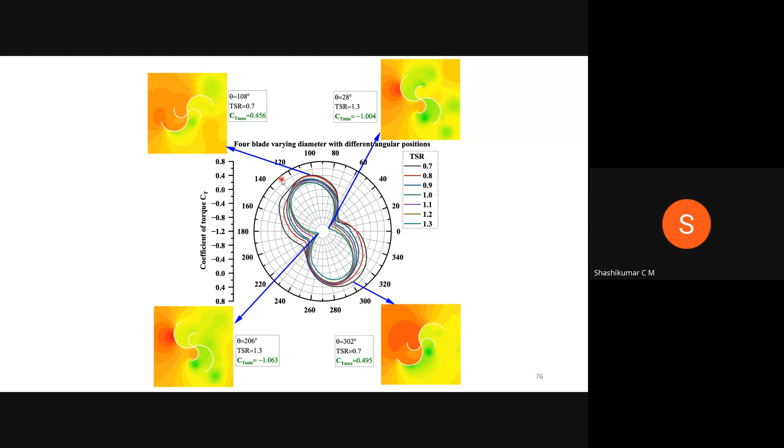This is another case with two advancing blade profiles added to the same turbine. How the addition of small advancing blade profiles to the two-bladed turbine influences performance can be found with the help of this polar plot. This is the last case, showing how increasing the number of blades influences the negative torque and turbine performance. Here many lower pressure zones and many higher pressure zones are present. The overall average torque of the turbine is lesser compared to the two-bladed turbine, and in most of the cases negative torque is obtained from this picture. The total average torque is lower compared to the two-bladed conventional turbine blade profile.

Also, instead of installing the Savonius kind of turbine in straight channels, if we install the turbines in bent channels - because in most cases channels are not straight, and in some places curvature will be present - before installing the turbine in the channel with various bends, we conducted a numerical study to find out which angle of rotation, or which angle of channel bend, gives better results.

This is a similar kind of channel with different bend angles ranging from 30 degrees. This is the exact 90 degree bend channel, also the 60 degree bend, and the 30 degree bend. The inside curvature is 90 degree, 60 degree, and 30 degree. We conducted the 3D numerical analysis for the case of straight channel, and also 90 degree, 60 degree, and 30 degree bend channels.

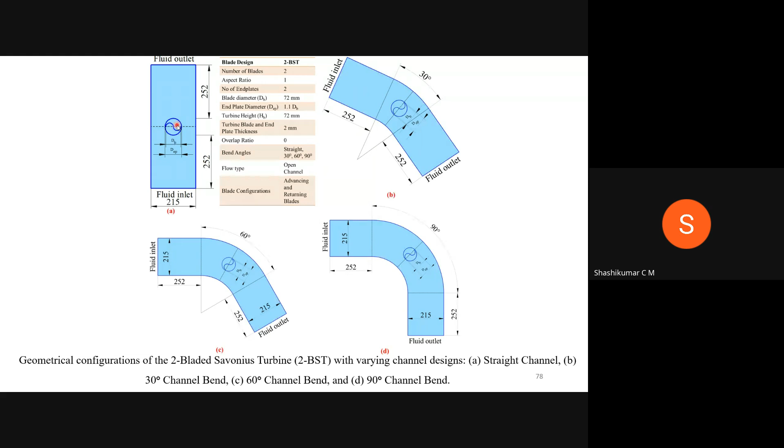This is the schematic diagram of the channel, having a straight channel and also a 90-degree bend. This is the wall of the channel, two side walls, and one bottom surface. The turbine is placed exactly at the center.

Why did we place the turbine exactly at the center? Because at the wall side, the velocity of the water will be less due to the no-slip condition - the velocity is very low at the wall side - so the water velocity is higher exactly at the midpoint, the center line of the channel. So in all cases the turbine is placed exactly at the midpoint of the channel.

This is the schematic diagram of the turbine having the straight design and also the 90-degree bend design. To conduct the numerical study for all the angles - straight channel, 30 degree, 60 degree, as well as 90 degree - a 3D model is created, that is, a 3D computational domain is created for the case of the bend channel. This is one of the schematic diagrams of the 3D model for the bend channel.

The advancing blade is nearer to the curvature. Whatever fluid enters will be hitting the advancing blade profile. Suppose, instead of the pressure outlet, if we use the inlet condition, the turbine performance will be reduced. This condition also we have carried out.

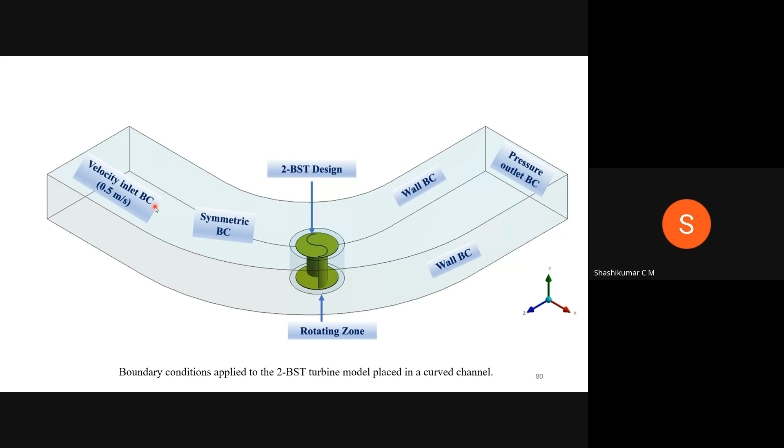Since the top surface is exposed to the atmosphere, the boundary condition provided at the top side is the symmetry boundary condition. There is no change in the values of velocity at the top side, so that the symmetry boundary condition is provided in the top side. We need to give the RPM to the shaft with the help of the tip speed ratio; RPM as well as the angular velocity can be obtained and can be given as an input to the turbine.

And also similar to the previous case, we need to discretize the computational domain. The fine mesh will be provided to the rotating zone, and the coarse mesh will be provided to the stationary zone. Almost around 35 lakh elements we have got in this entire computational domain, so with the help of a high-end computational facility only we can perform the numerical simulation. This is the rotating zone, stationary zone, and also this is the expanded view of the boundary layer.

The boundary layer is also provided on the surface of the blade profiles by maintaining the y plus value of less than 1. And also since it is a rotating case, it is not a laminar case, it is a turbulent case. SST K omega model will be used for the turbulent case. For most of the rotating cases, as well as the flow over an aerofoil, SST K omega model will give better results compared to the K epsilon model and different types of other turbulence models.

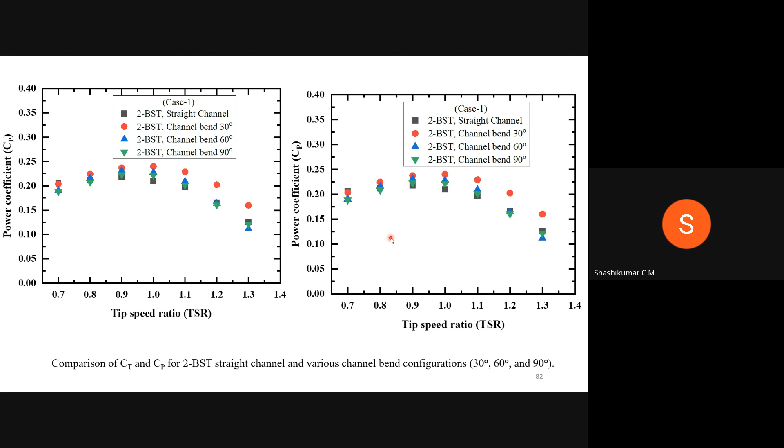This is the comparison of straight channel with 30 degree, 60 degree, and 90 degree. This plot will give the variation of coefficient of power as well as the coefficient of torque. This is the coefficient of power variation plot. In this case, the 30-degree bend channel is giving better results compared to a straight channel as well as 60-degree and 90-degree channels. So installing the turbines in the 30-degree inclination and also maintaining the advancing blade nearer to the curvature, it will give improved performance.

And similarly, for the bend angle of 30 degree, the maximum torque developed by the turbine is at an angle of rotation of 112 degree, because during the rotation of the turbine, at some angle of rotation the turbine will give negative torque, and at some angle it will develop positive torque. For this particular 112 degree angle, the turbine will develop the higher positive torque. Then overall performance of the turbine will be higher, so that the average torque is also higher for the case of 30 degree bend angle.

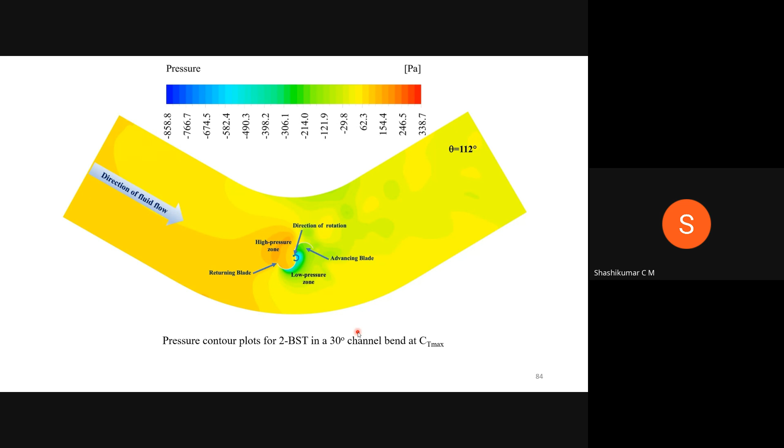For the case of 30 degree bend angle, the fluid is directly hitting on the advancing blade profile due to the curvature of the channel, so that even if we use 60 degree and 90 degree, the turbine performance for the case of 30 degree bend angle is higher compared to straight channel, 90 and 60 degree channel.